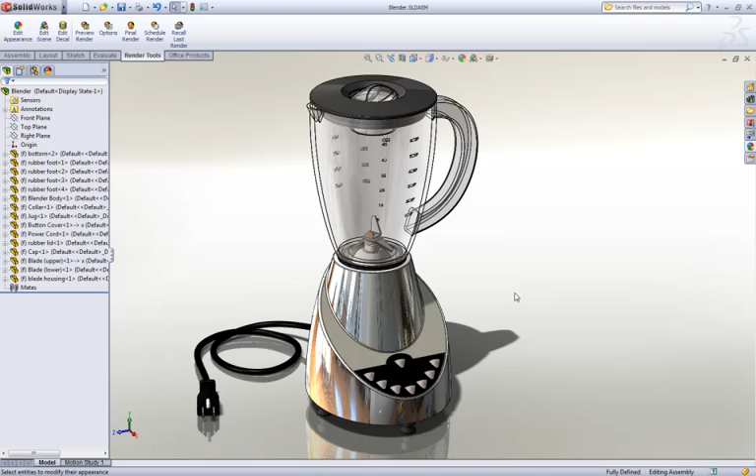RealView appearances in SOLIDWORKS 2011 have been enhanced to give you full control over how they look, so you're no longer limited to the default materials.

As well as being able to control the colour, you can also control the diffuse lighting and specular highlight, as well as the amount of reflections, and even make the reflections blurred to get that satin finish look.

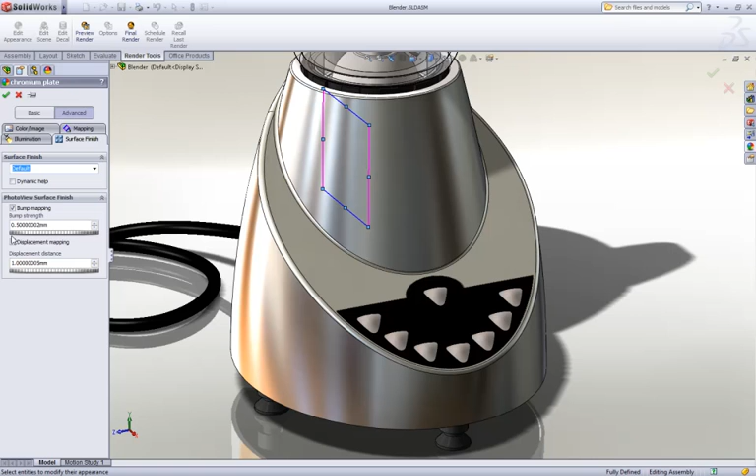If you're using PhotoView, you can also turn the object into a light. Some new surface finish types make the possible combinations of material properties almost limitless, making your models look fantastic.

Decals, once only available to PhotoWorks users, are now available to everyone, so you can get great looking models with labels using just RealView in SOLIDWORKS Standard.

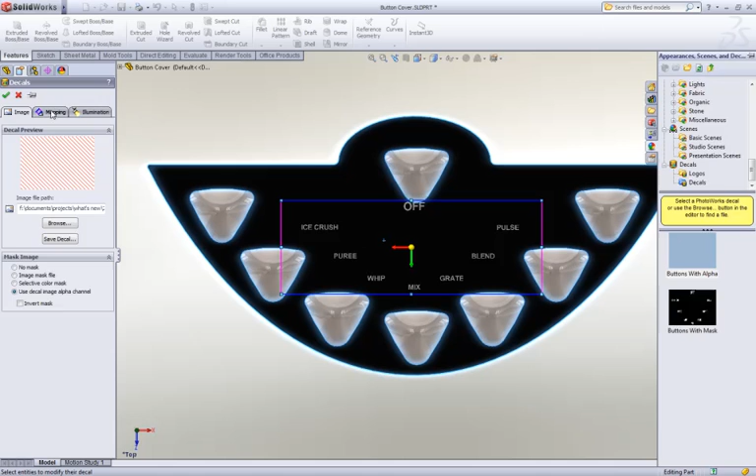And now they also support the alpha channel in the image, so any transparency information in the file will be used to show the model faces through the decal. Of course, with the interactive on-screen editing, it's easy to get the decal looking just right.

Just like the appearances, you get full control of how the decal will look, from full solid colour to reflective metallic labels.

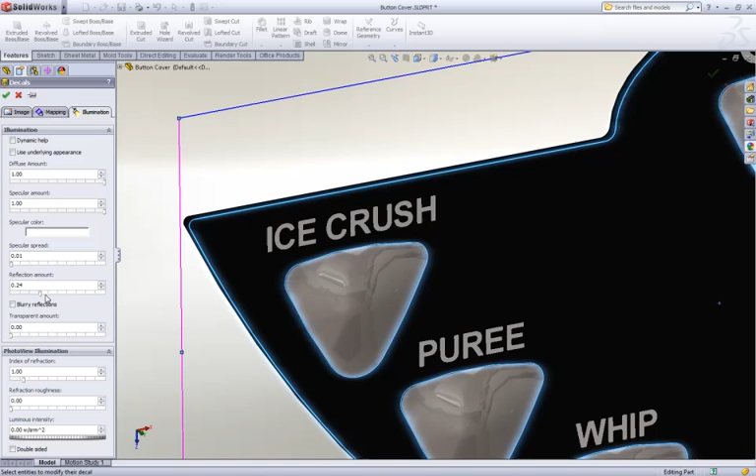Once you've got it looking just right, we can go ahead and render it.

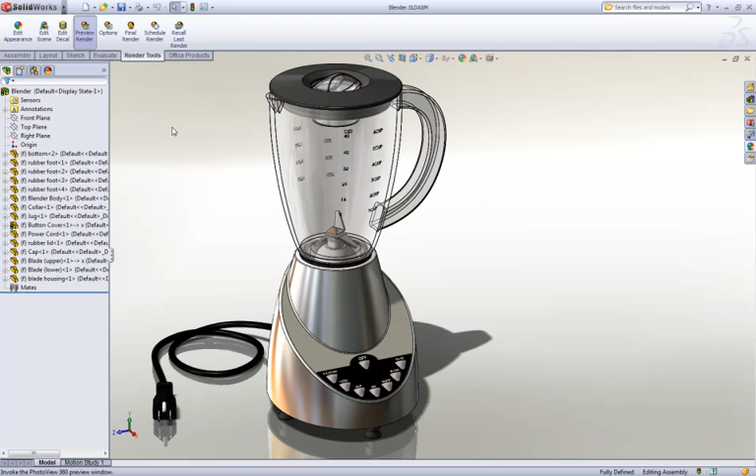Users of SOLIDWORKS Professional and Premium have always enjoyed being able to create photorealistic renderings for presentation and marketing purposes. However, many did not realise the full potential of PhotoWorks and found it difficult to create good quality images in a reasonable amount of time.

So SOLIDWORKS introduced PhotoView360 to address these issues. It's extremely easy to use and extremely fast.

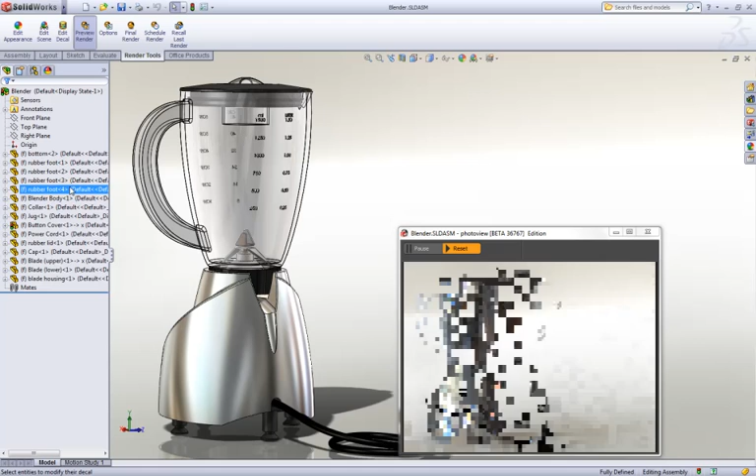In SOLIDWORKS 2011, PhotoView360 no longer runs as a separate application. It's completely integrated into SOLIDWORKS. You can preview exactly how the final rendering will look and make changes to your SOLIDWORKS model on the fly.

If you change the orientation of your model, the preview updates, and because it is what's known as a progressive renderer, you don't have to wait until it's finished updating the preview before making any further changes.

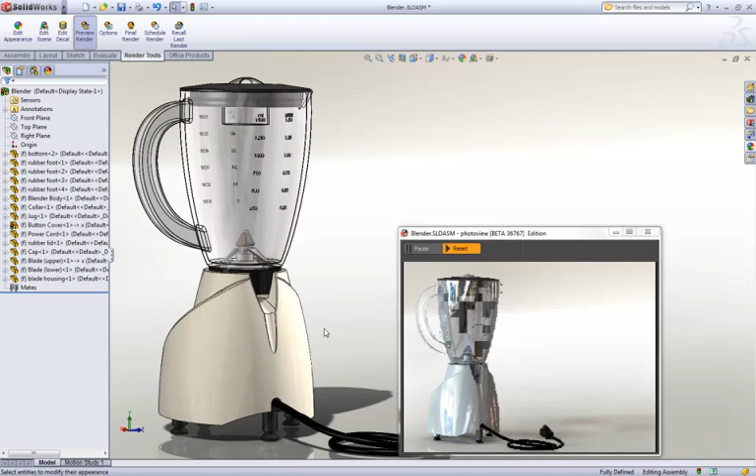For example, if you wanted to experiment with different material types, you simply drag and drop them onto your model as you would do normally, and the preview will update to reflect the change.

Likewise, if you wanted to change the scene, this also shows up in the preview window, so you know exactly what you're going to get.

There's a new tab on the Feature Manager called the Display Manager. It groups together all the visual properties such as appearances, decals, scenes, lights and cameras.

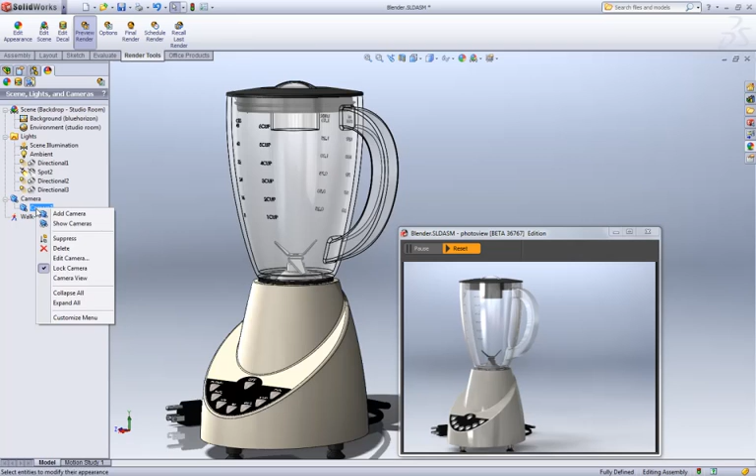You can use the cameras to view your scene, and the perspective and depth of field are set there too.

Let's do one final scene change and place this blender in the right environment, a kitchen. Shouldn't really be on the floor, so let's make some modifications to the scene and place it on the countertop.

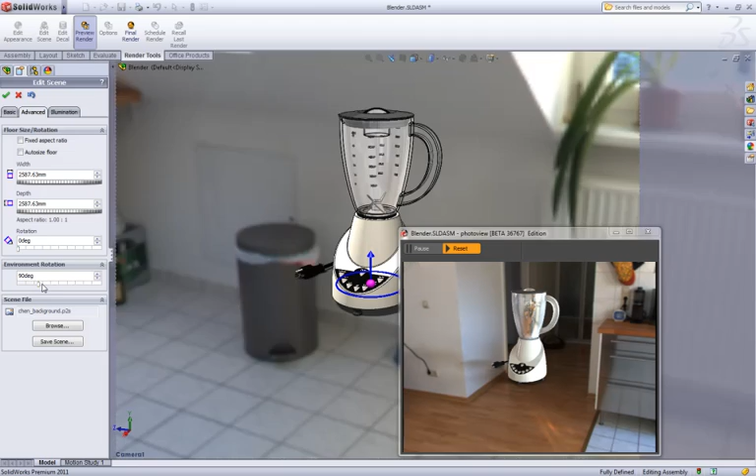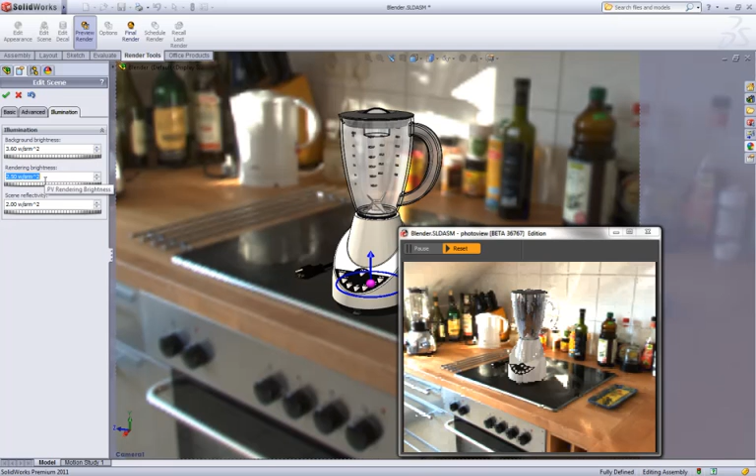A great addition here is to be able to individually control the brightness of the background, the model itself, and also how much the model reflects its surroundings, so no need to add extra lights or adjust the brightness later in image editing software. Looks great on a projector too.

And yes, I do have two blenders.

PhotoView360 will now use lights from SOLIDWORKS too, so to make this image a little bit more realistic, we can simulate the sunshine coming through the window, lighting the blender, casting shadows, and adding glare as well.

When all the setup is done, you can hit the final render button, which will run as a separate application, so you can carry on working in SOLIDWORKS whilst PhotoView360 is rendering.

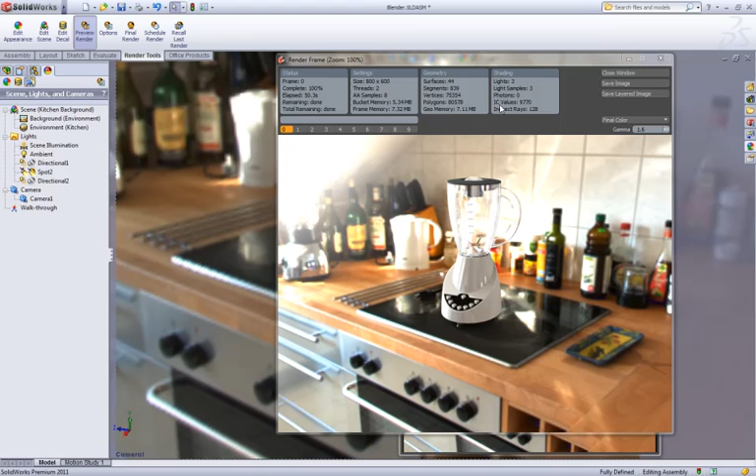Finally, no presentation will be complete without an animation. Not only is PhotoView360 fully integrated into SOLIDWORKS, but we've also added a bunch of extra stuff too to make renderings fast, easy and enjoyable.